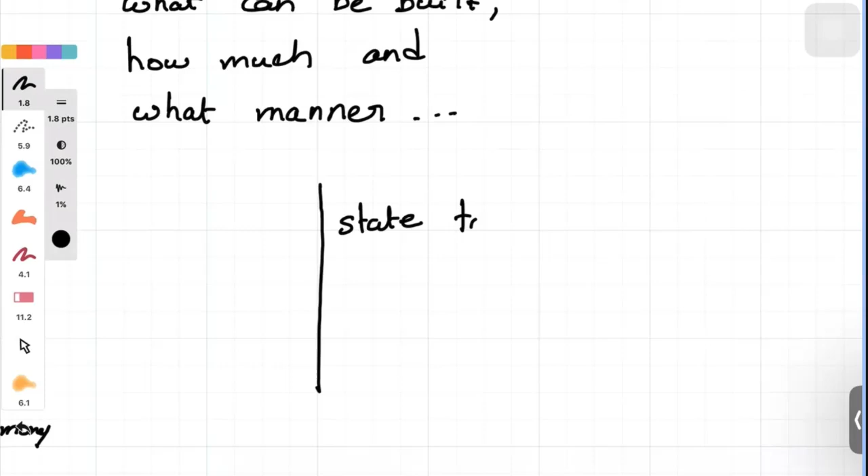Okay. So these bylaws are predominantly derived from legal powers of state and the central government rules. Okay. So predominantly state and municipal. State, it's town and country planning acts. Second, municipal acts and development authority acts. Okay. Local bodies, we'll call that as

MBBL 2016. It means Model Building Bylaws. Okay. And NBC 2016, we have spoken about this a lot. It means National Building Code.

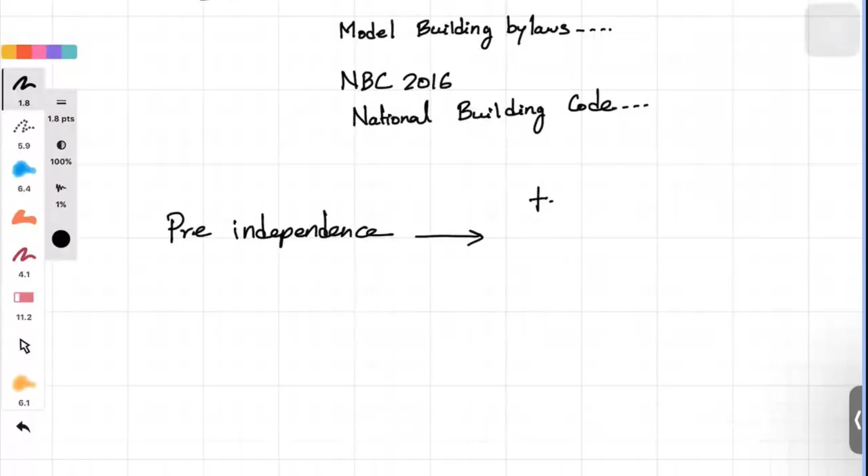Okay. So now we'll quickly have a look at the history of bylaws. How it started, who started it first, and what happened before. All those things we'll discuss in detail. First, in pre-independence, we have the first Town Planning Act. I am talking only based on India, okay. That is actually the Town Improvement Act.

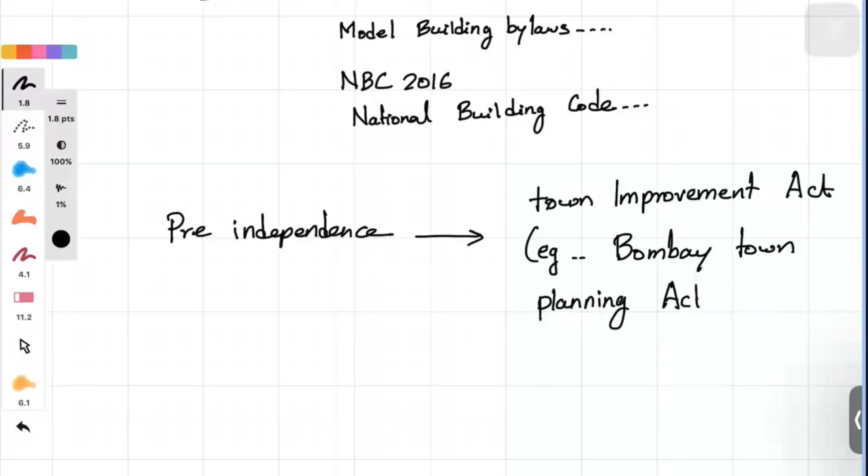Okay. Example, Bombay Town Planning Act 1915. This is one of the oldest town planning acts in India. So this introduced first land use and sanitation regulation. This is mainly used for sanitation regulation. Okay. Then post independence we have the formation of local planning authorities.

Okay, this is post independence, that is 1947 to 1970. This is the time where we started a lot of government bodies for control. So it is like formation of local planning authorities. One such is the Act in 1957 that led to DDA and the first master plan in 1962. Okay, so I'll explain in detail about all these things when we are discussing the town planning syllabus. Now it's only the chronology of all bylaws.

Okay, and after this, 1980 to 2000, during this time only they introduced concepts such as FSI. FSI and FAR are the same. FAR, these norms, zoning, setback, parking norms. So all these things started between 1980 to 2000. This is the first time they started doing CAD, computer aided approval system.

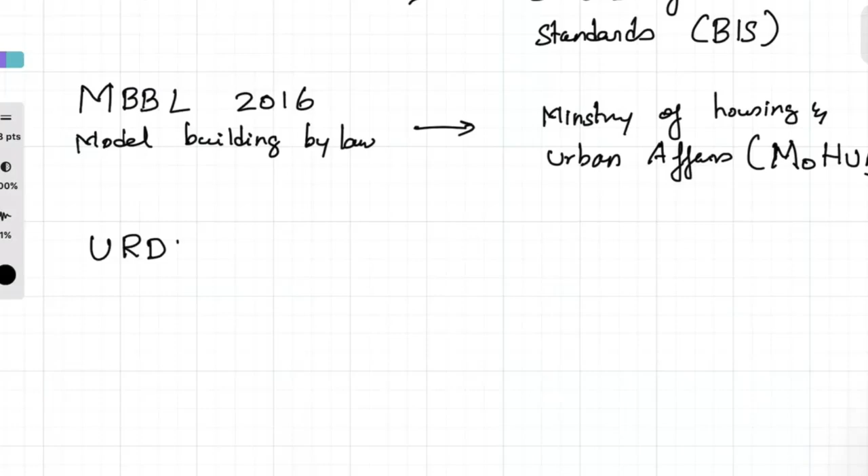URDPFI guidelines. This is in 2015. This is also given by the same MoHUA. So this is for urban and regional development planning. This we'll discuss in detail, URDPFI guidelines alone, in a separate class. This is also given by MoHUA.

Okay. Next, Town and Country Planning Act. This is state. So all these Town and Country Planning Acts will be given by that particular state government. And similarly, we also have another important interesting act, that is called the Real Estate Regulation and Development Act. This is also in 2016.

This is called, okay. So this is again very, very important. This is also by MOHUA, Ministry of Housing and Urban Affairs, and also each state has one organization. That is called State RERA. Again, we have another interesting act, that is called Environment Protection Act. This is in 1986. And further we have EIA notification in 2006.

Done? Shall we have a quick recap? So NBC, all of you know about NBC. NBC is a comprehensive technical and administrative provisions for design, safety and building. So as you all know, NBC has 13 parts. I hope everyone knows this. NBC has 13 different parts. Each part deals with a different section.

So for example, we discussed lift has part 8 and the disabilities has part, I don't remember. Fire has part 4. Like that we have different parts for different areas. And again, this is with MOHUA. This always talks about floor area index, FSI, floor area ratio, density, open space, and also about community facilities. This is predominantly URDPFI guidelines.

This is very, very important. So we'll be having a separate class only dealing with this, after studying housing and all. And again, this is state RERA. This RERA, real estate development, always governs the registration and customer protection. And again, EIA, this is again very important. We always need environmental clearance for large developments.

Next, a very important aspect, that is floor area ratio, or we also call this FSI. Everyone knows this formula, but I'm repeating it once again. FAR equals total built up area on all floors divided by plot area.

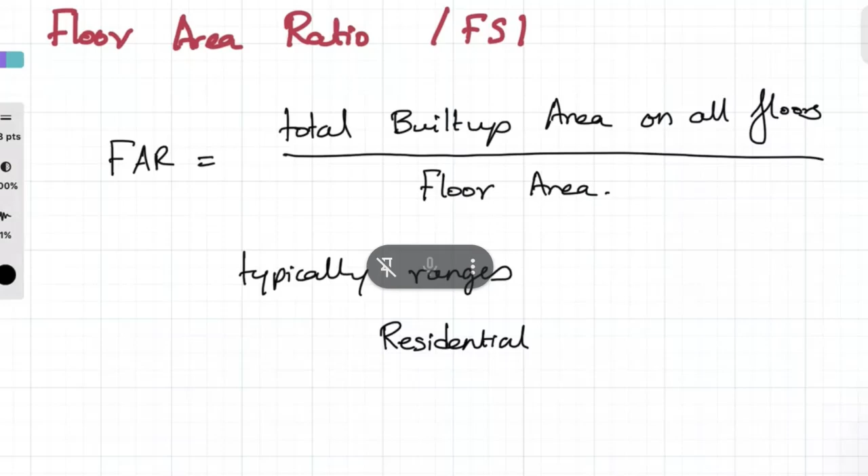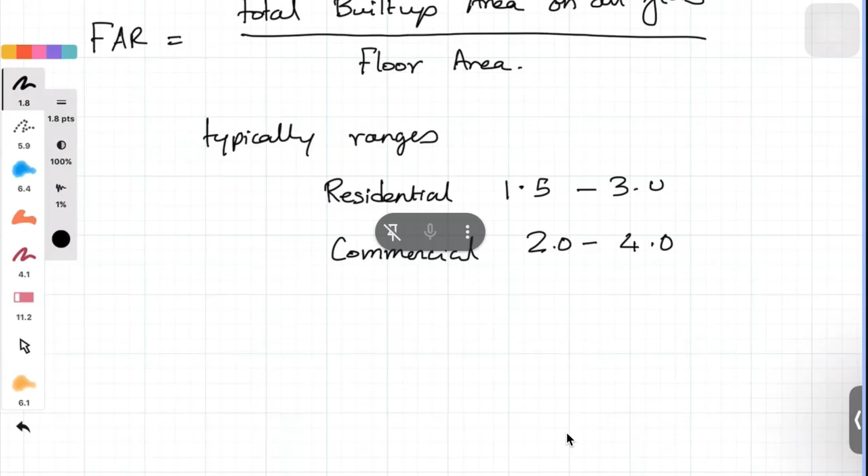Okay, so typically it ranges, for residential, from 1.5 to 3. For commercial, again I am telling across the country. It's not for Tamil Nadu, so don't get confused whether it is for Tamil Nadu; it is for across the country. For CBD and TOD corridors, up to 5.

Now tell me, what is CBD and what is TOD? CBD is nothing but Central Business District. TOD is transit-oriented development. Okay. So next, coverage and open space. This is again based on two important things: one is called ground coverage, another one is called setback.

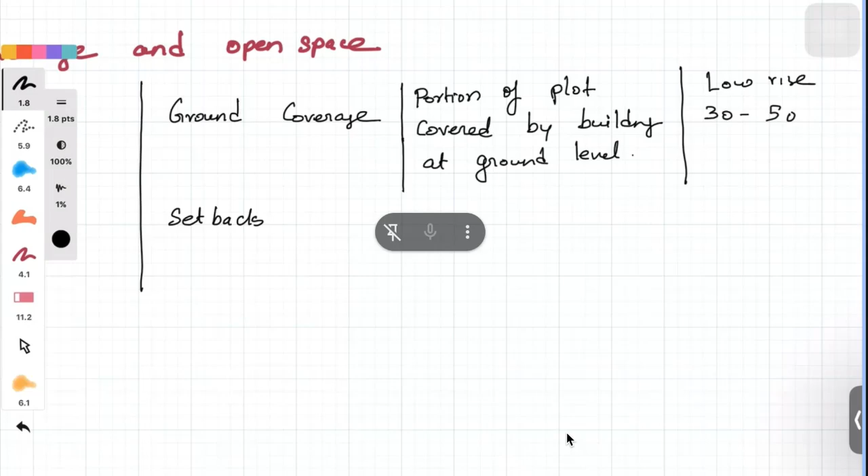Ground coverage is the portion of plot covered by building at ground level. For low rise, 30 to 50%. For high rise, 35 to 45%. Low rise means less than 4 floors; less than 4 floors we call low rise.

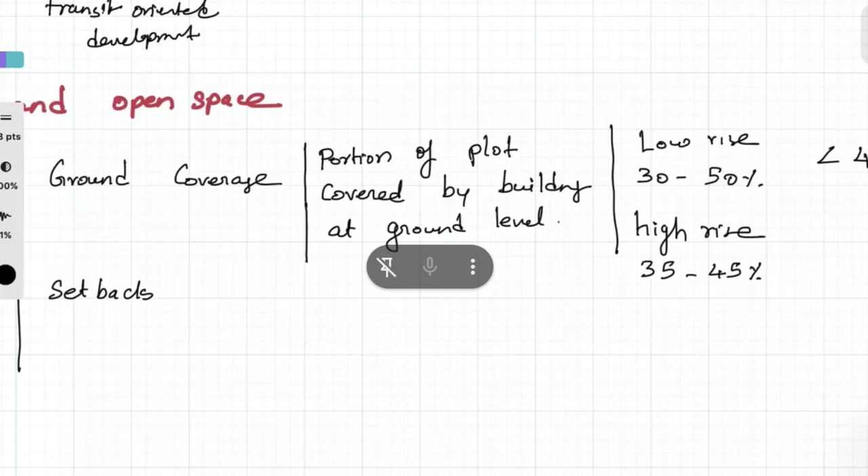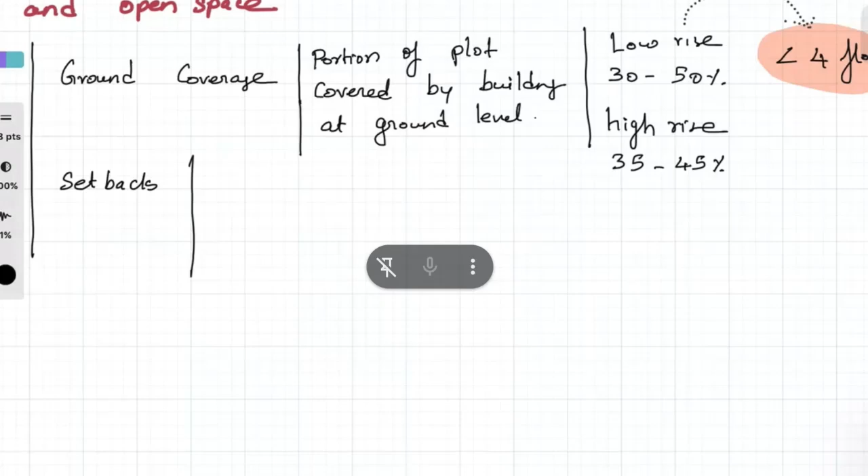Next, what is setback? It is a minimum open space from plot boundaries to ensure light, ventilation, and also fire safety. It varies with height and road width. For example, for residence, front is 3 meter, side is 1.5 meter, and rear is 3 meter. This is common, but it varies from place to place based on the location.

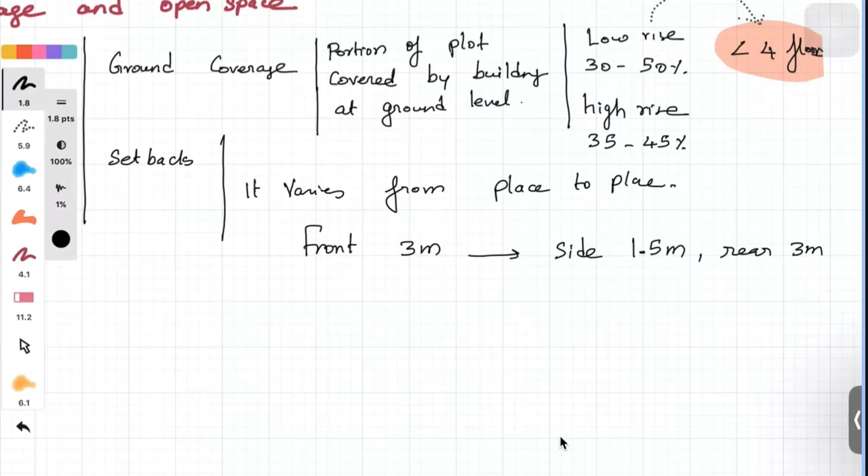So in general, it is front 3 meter, side 1.5 meter, rear 3 meter. This is the normal thing for residence. Next, maximum building height allowed with respect to road width. If road width is 9 to 12 meter, then the maximum height is 15 meter.

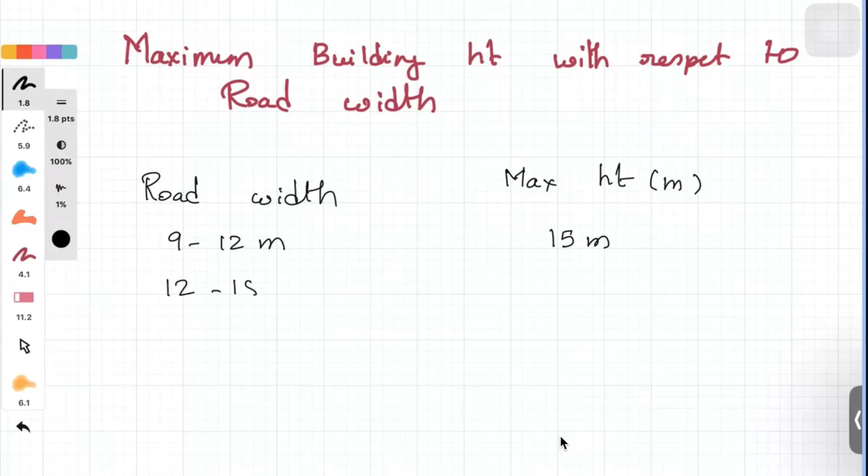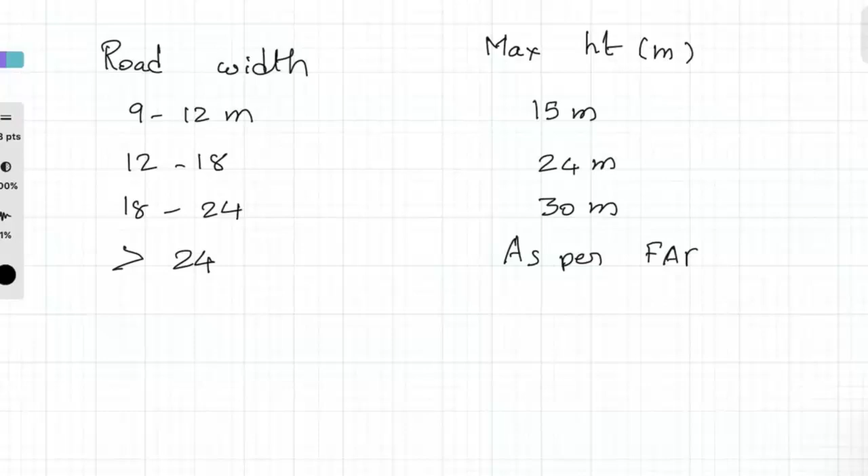12 to 18, then 24 meter. 18 to 24, then 30 meter. Greater than 24 meter, then we have to go as per FAR and aviation clearance, and the authority that governs this is the Airport Authority of India.

Now, parking standards: use, minimum parking, and approximate area per ECS. Everyone knows what ECS is? Can you all hear me? Yes, sir. ECS means equivalent car space. Residential, you need one car per 100 square meters of BUA. Built up area is called BUA.

So ECS is 23 to 25 square meters. Equivalent car space, I'll write here. BUA we'll be using again and again, for all problems. For office or institution, one car per 75 square meters; approximate area you just multiply by 25 square meters. This 25 is what we will use everywhere; 23 is only for residential. For all other calculations we use 25 square meters.

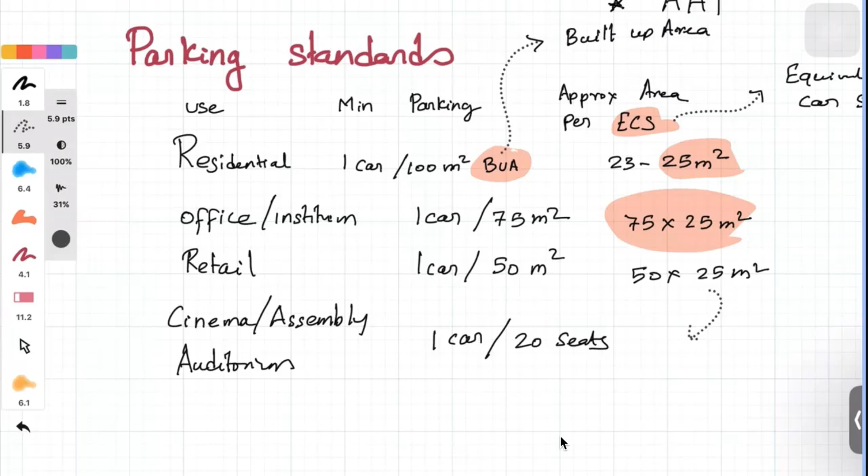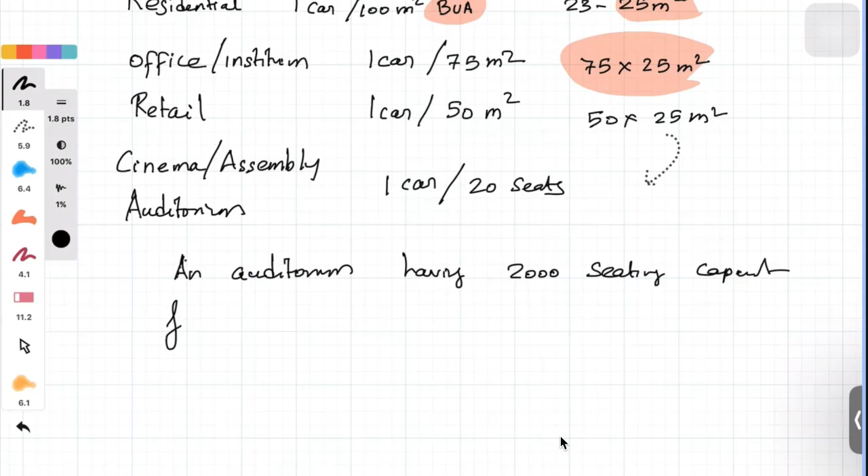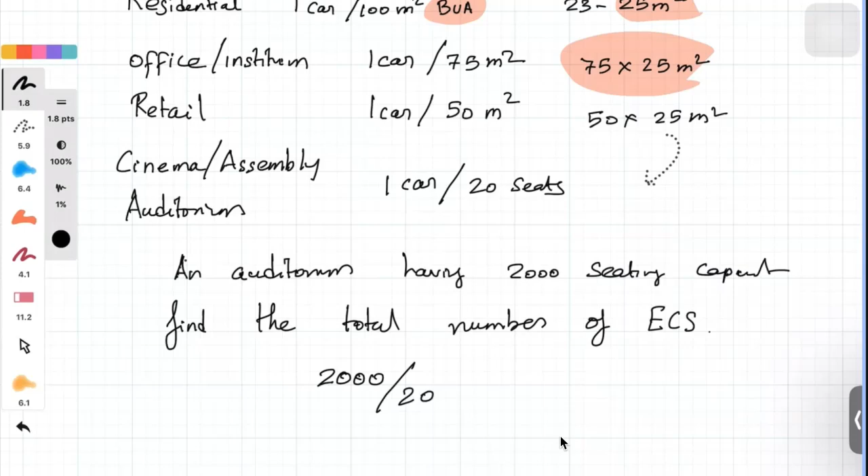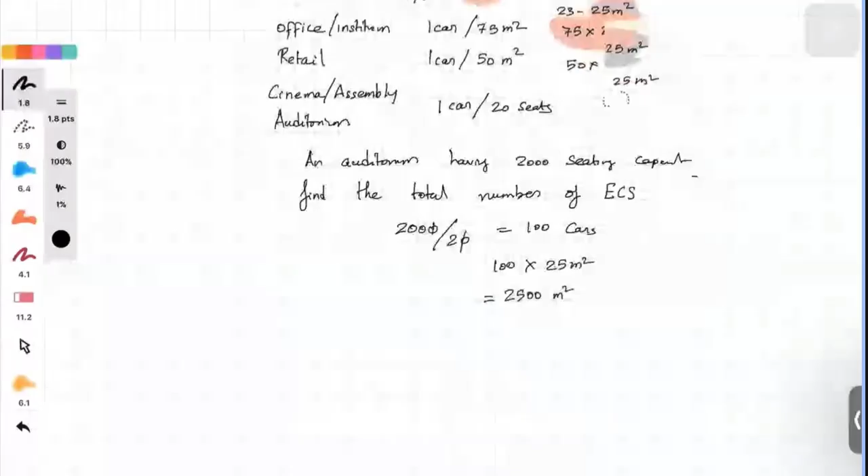For example, an auditorium has 2000 seating capacity. Calculate the number of ECS required. How will you find it? 2000 divided by 20 gives 100. So 100 cars, 100 into 25 square meters, that's 2500. So, it will be easy for you.

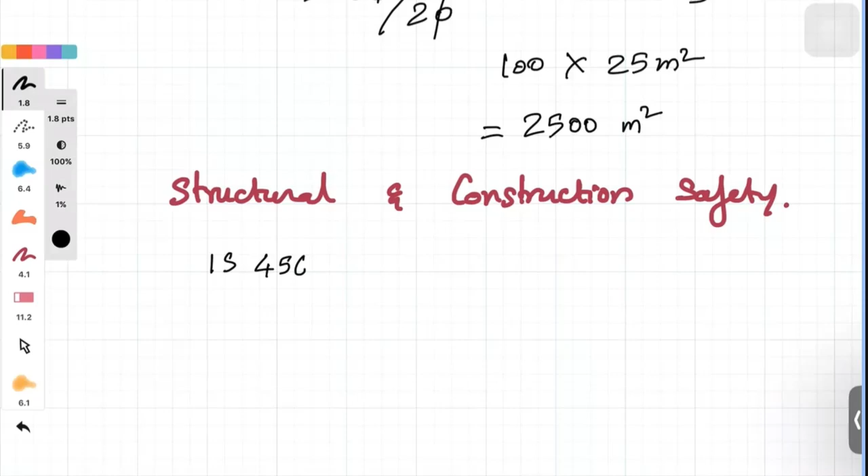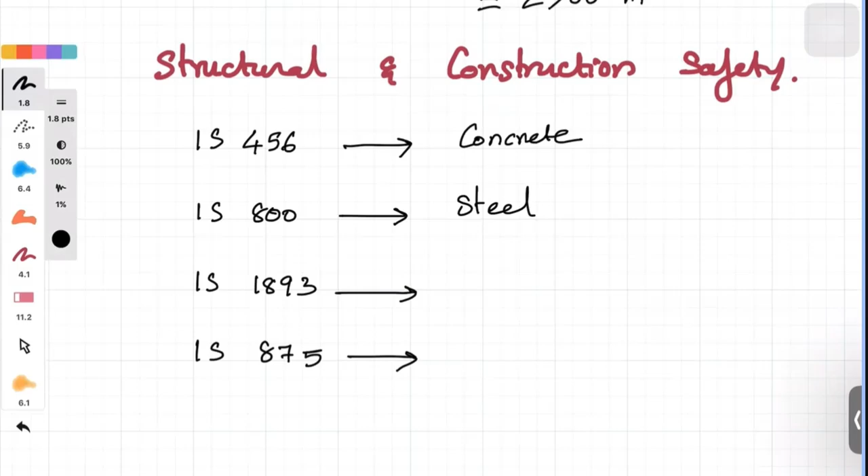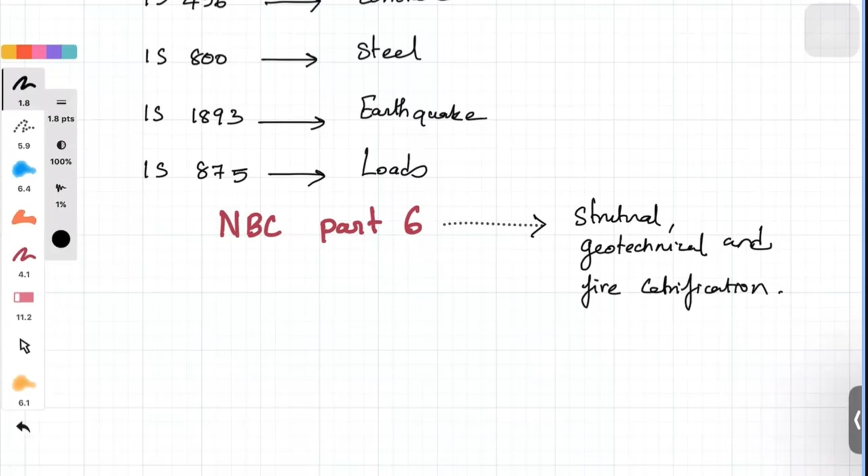So this is on loads. Again, NBC Part 6 talks about structural, geotechnical and fire certification. Not fire safety, fire certification; there is a difference. Fire and life safety is Part 4; we'll have a separate class on this. Quickly we'll see what's under it.

Classification such as industrial, storage, etc. It also talks about exits and staircases. Minimum width is 1.25 meter for high rise. And as we all know, maximum travel distance is 30 meter for any building type.

Okay, and it is 45 meters if we have sprinklers. So if we have sprinklers, the maximum travel distance is 45 meters. If we don't have sprinklers, then it's 30 meters.

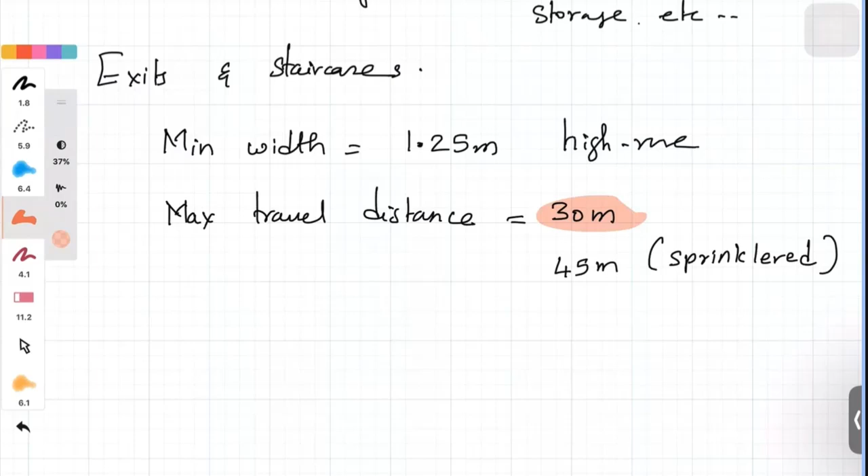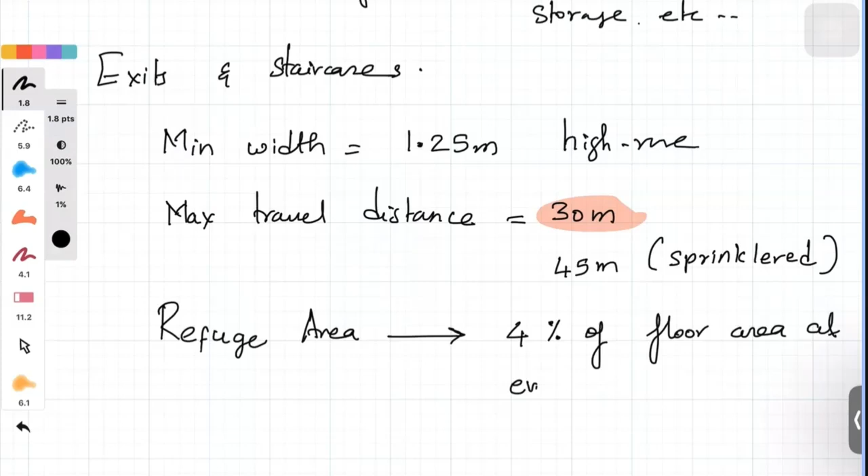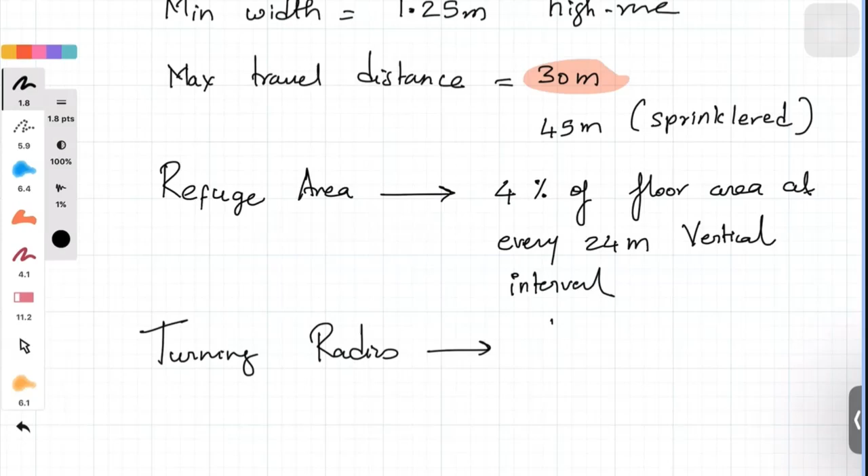Refuge area is 4% of floor area at every 24 meter of vertical interval. And turning radius of fire truck is 9 meters minimum.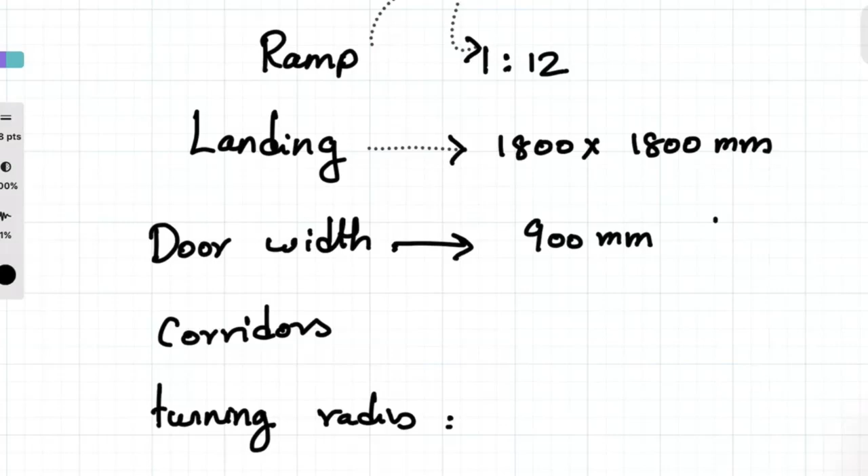For ramp landing, as we noted, it's 1500 mm minimum length at every 9 meters. Actually 1500 is the minimum, 1800 is optimum, and 1800 is more than enough.

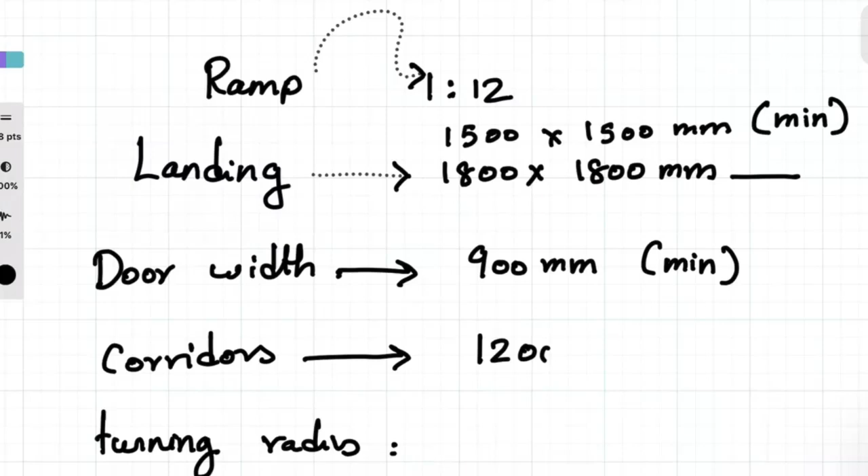Corridors are 1200 mm, that is 1.2 meters. Turning radius is 1500 mm. This is important.

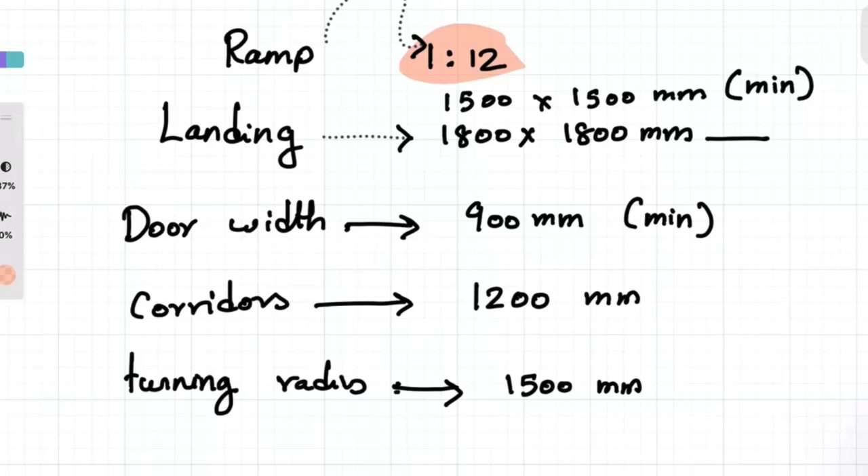And again, for every 9 meter length of ramp, you need a landing. After 9 meter length, we need a landing. For example, whether it's 5 floors or 10 floors, the same rule applies for ramps.

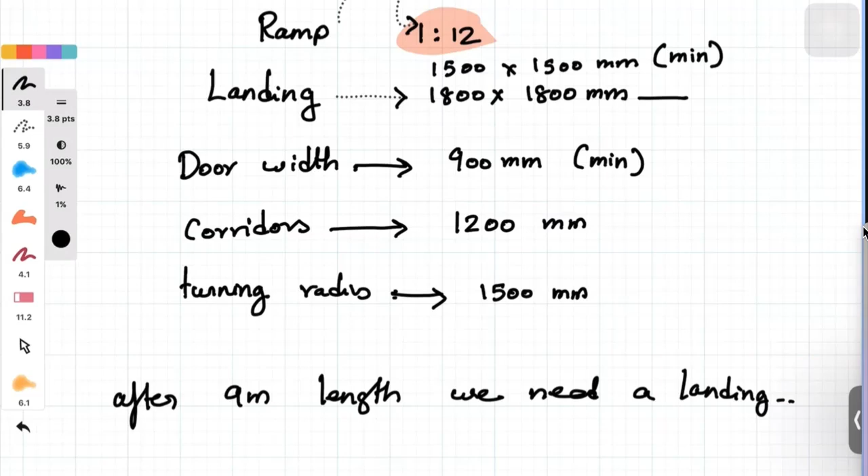Today we've covered a lot. Shall we work out a few problems? Yes, ma'am.

A residential plot measures 30 meters by 20 meters. The permissible FAR is given and ground coverage is 50%. Find the number of floors that can be built. A simple, direct question. Assume each floor uses full ground coverage.

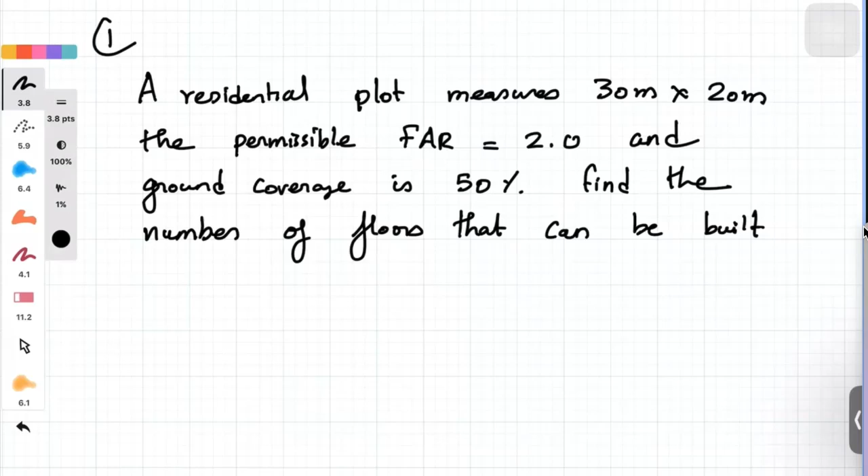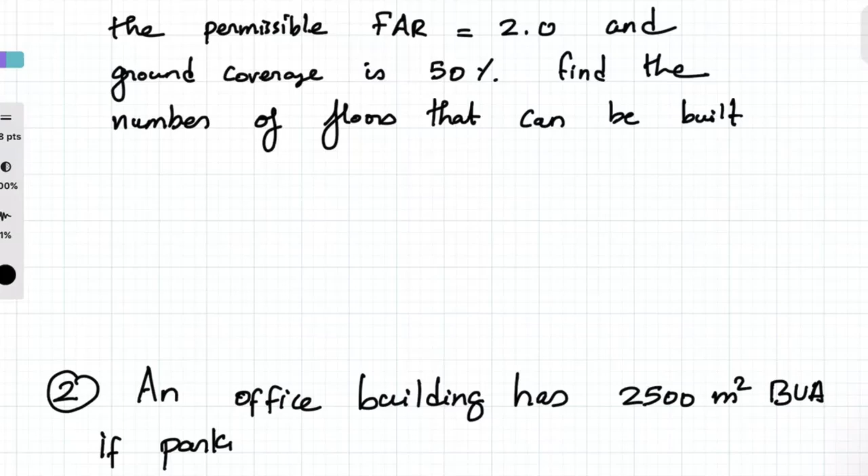Second question: an office building has 2500 meter square BUA. If parking is 1 ECS per 75 meter square, find the total parking area.

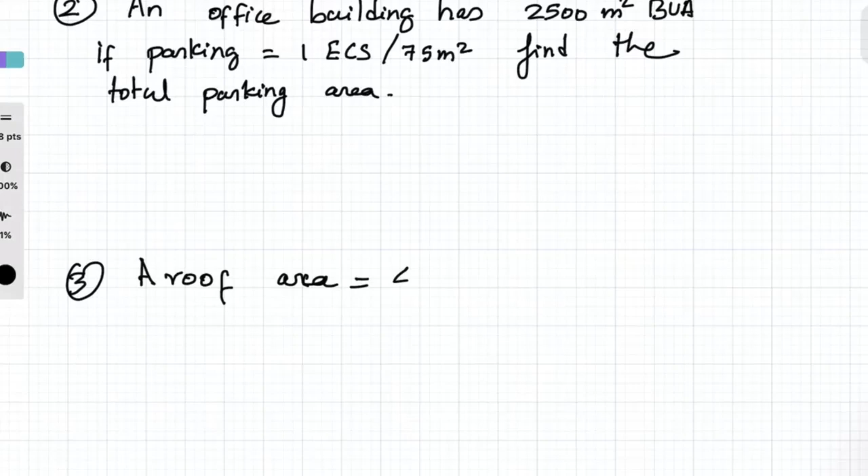Third question: a roof area of 400 meter square, annual rainfall equal to 1000 mm, efficiency is 85%. Find the yearly rainwater potential in meter cube.

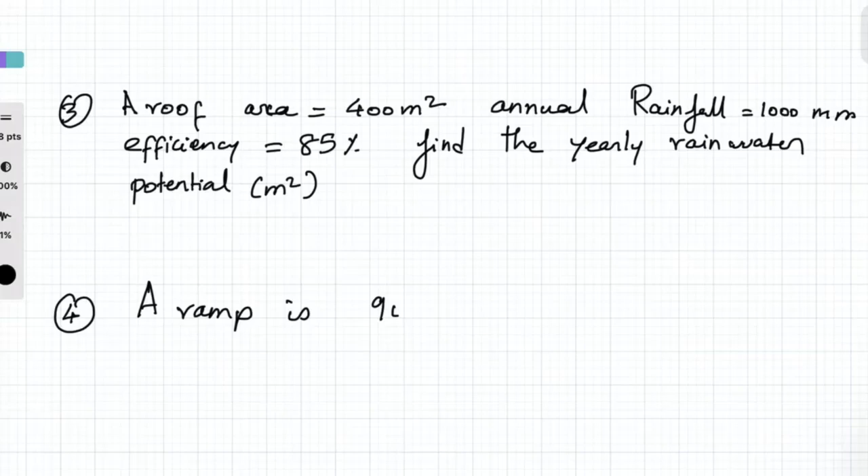Fourth, a ramp has 900 mm rise, find the total length. Very good, 4 floors, correct.

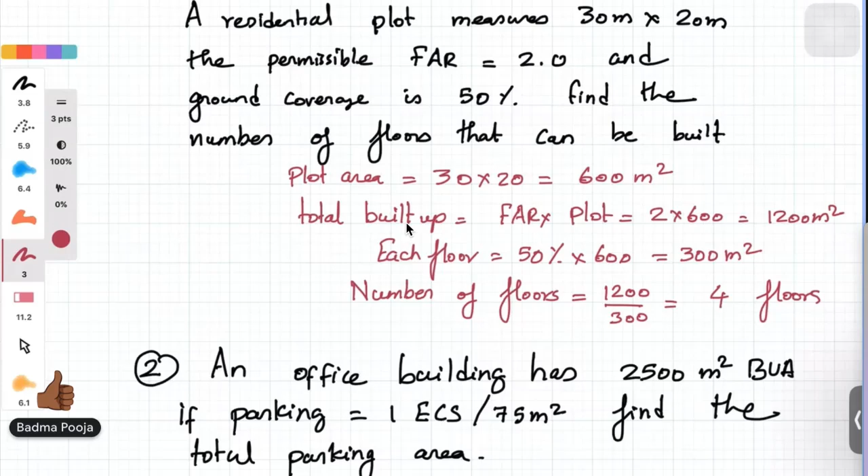So this is direct application. They have given the plot area, total built up area, floor area ratio or floor space index.

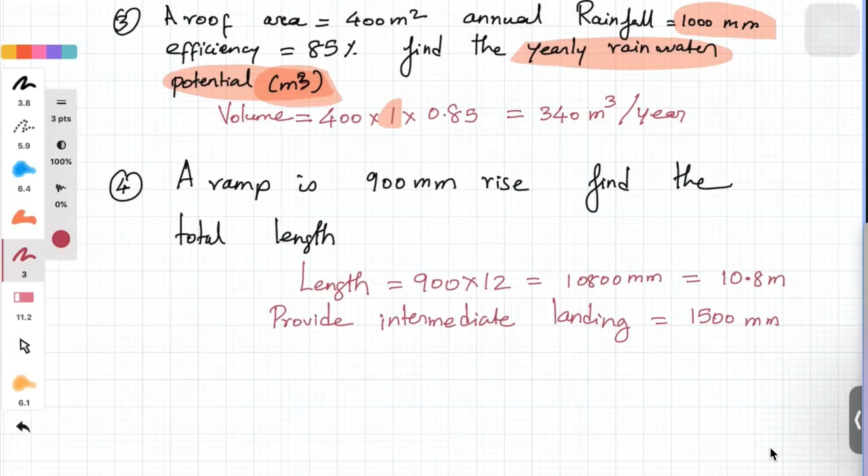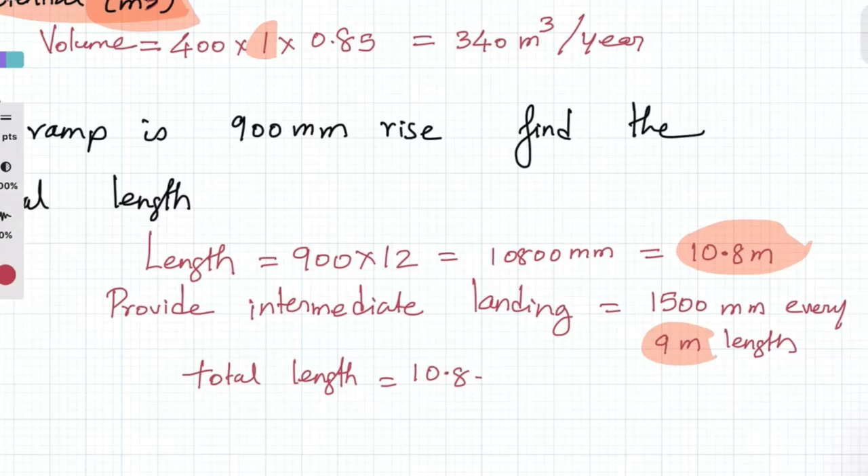But that answer is not correct. We need to provide intermediate landing, which is equal to minimum 1500 mm for every 9 meter rise, for every 9 meter length. So since this number is greater than 9 meters, total length equals 10.8 plus 1.5 which equals 12.3 meters.